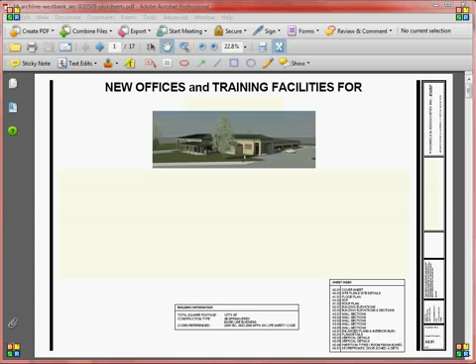What is being displayed here is a 13,000 square foot office and training facility in Louisiana, shown with special permission from the architect. The architect of record for this project is Alvin Hotard, located in Marrero, Louisiana.

This project required 17 sheets of drawings, and it was finished in 266 man-hours. This PDF plot sheet set is the final submittal to the architect showing all 17 sheets.

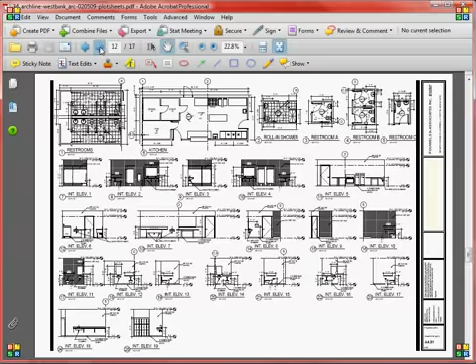Although this is a relatively small project, all of the processes of production and wide area collaboration for this project are precisely the same, even for the largest, most complex projects.

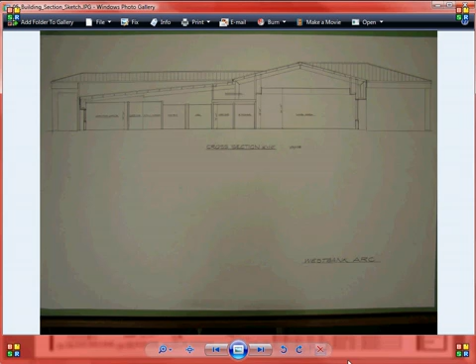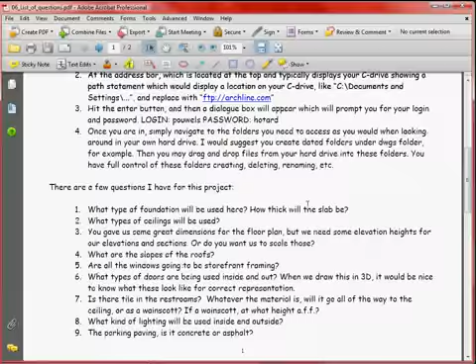Every member of the CAD production team formulates a list of questions which is then submitted to the architect before commencement of drawing production. Everyone is involved in looking critically at everything. For example, what are the slopes of the roofs? Are all the windows going to be storefront framing? And the architect's response to those two questions are shown here.

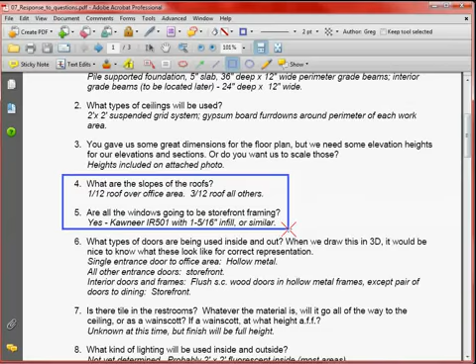This plot sheet set was the first progress upload to the architect in the first week of production. Progress uploads were made weekly over a 6-week period. This upload also included exported files into AutoCAD drawing files for the architect to send to his engineering consultants to use as backgrounds for their drawings.

The poche is part of the concrete slab in the model, which gets turned off later.

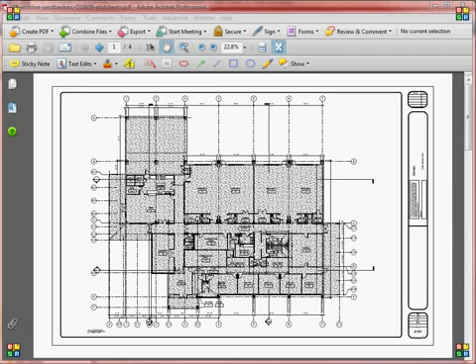We included a quick rendering of the model which does not show the grade or any site conditions around it. This is the AutoCAD drawing exported out of Revit for the architect's consultants.

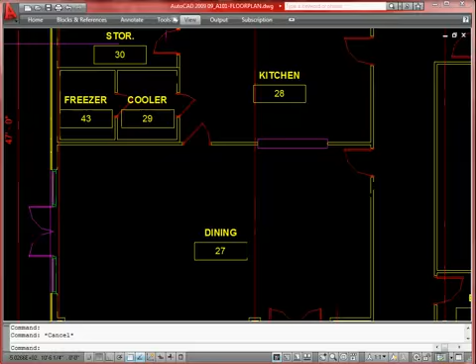The dimensions are associative. The doors are blocks. And the plumbing fixtures are on a separate layer, for example.

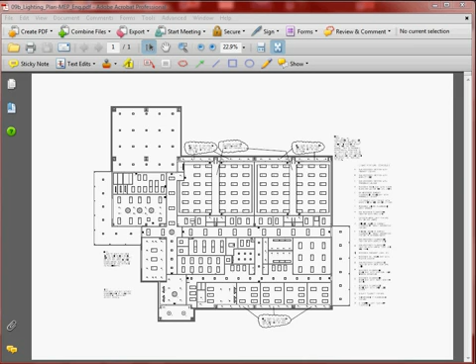This is a lighting layout submitted by the electrical engineer. It was sent to us in AutoCAD format, but we did not incorporate this into our model because the architect had not approved it. Shown here are markups from a live internet session with the architect, and also markups by ARCHLINE aside from the architect as part of our quality control internally.

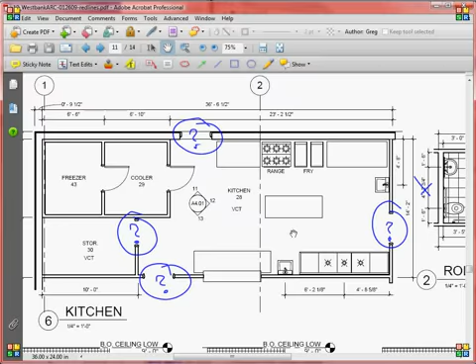As an example, here we show an enlarged plan without any door swings. The architect did not need to instruct us to add these. We automatically review these sets and make the corrections according to what the drawings should look like.

Here, the architect instructed us to use vinyl composition tile in lieu of ceramic tile. These other markups are also part of ARCHLINE's quality control aside from the architect.

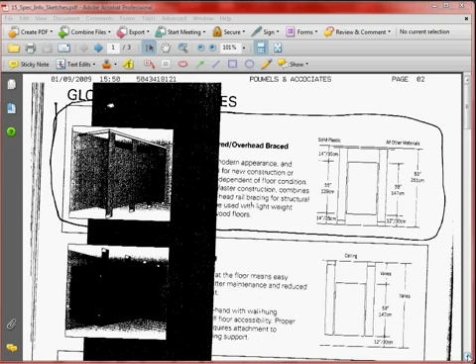The architect sent us more detailed information after reviewing our progress uploads and after live internet sessions with us. Many details were downloaded as CAD drawings from manufacturers' websites. This first shows the restroom stall specifications, then a section of a counter with steel bracket support.

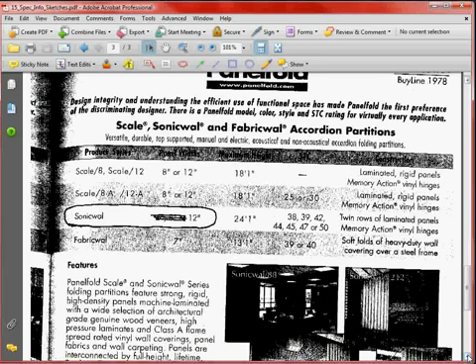The next is a Sonicwal Panelfold 1212 selected which would not fit in plan. So we verified with the architect that the Panelfold 6 inches was instead correct. Since the 3D model of the Sonicwal Panelfold 1212 was already created with parameters, we changed the parameter dimension of the Panelfold from 12 inches to 6 inches, and it adjusted the model instantly.

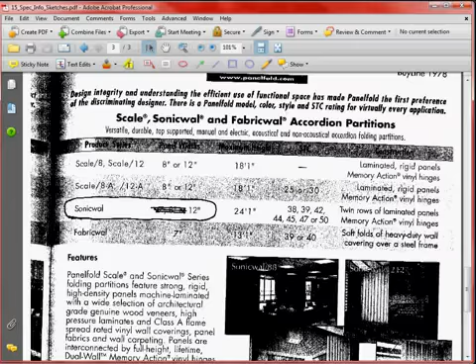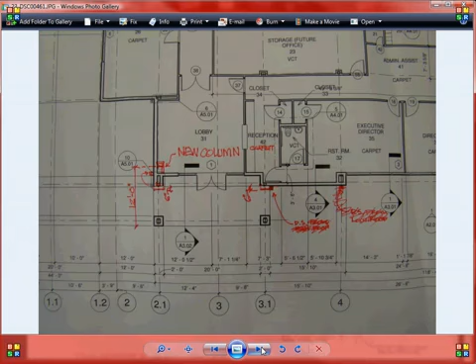The next progress upload was held back because the architect had communicated that he had a few more details to incorporate into the set and some more red lines from reviewing our previous progress upload and from the structural engineer's review. Finally, the architect was able to sit down and fine-tune the drawings with red lines.

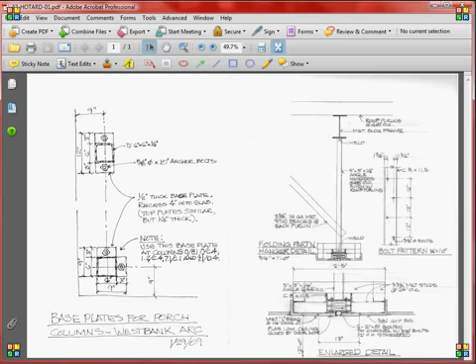But the red lines were minimal as a result of close communication with the architect via emails, phone calls, and FTP uploads and downloads. We spent another few days finalizing the drawings with quality control reviews. This is ARCHLINE's final upload to the architect, the 6th week of production.

The final weeks were not full 40-hour work weeks. ARCHLINE was on hold pending final information to be submitted by the architect.

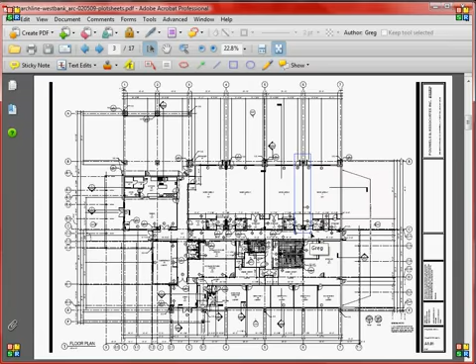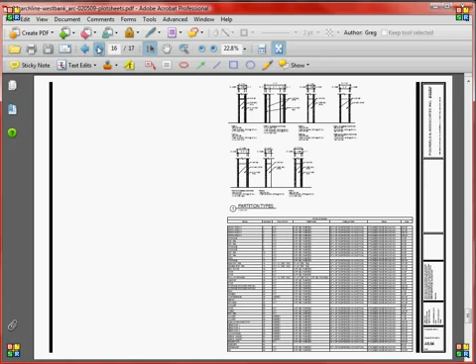The vertical details are complete, and an additional sheet was created for the spillover of vertical details submitted by the architect. Partition types were added on the same sheet as the room finish schedule, and the door and window details have been completed.

ARCHLINE then re-rendered 2 color schemes as selected by the architect in a night shot just for fun. This upload is close to 100% complete, subject to final review.